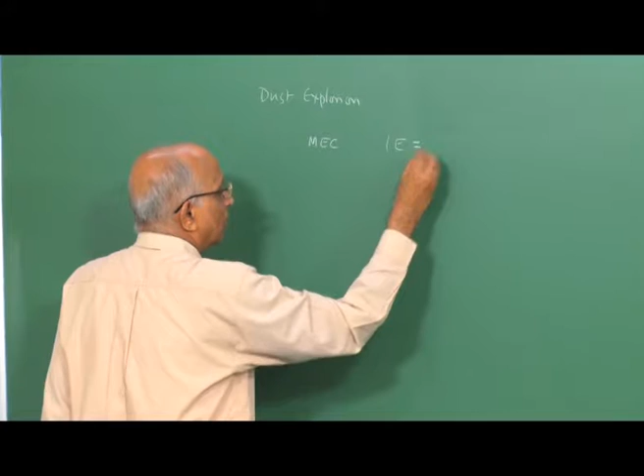In the class we just covered on dust explosion, we looked at the different types of dust. We found that a dust-air mixture is explosive, and that above a certain concentration, something like a minimum explosive concentration, is required to form a dust explosion. We also found that dust explosions are numerous, so there must be methods to control them. We looked at the sensitivity of dust mixtures to explosion, and also the consequences of explosion in terms of explosion severity. We defined an index of explosibility, IE, as the product of ignition sensitivity and explosion severity.

In today's class we take a slightly different topic, namely we look at physical explosions. That means we are looking at explosions being driven by some physical processes such as flash vaporization.

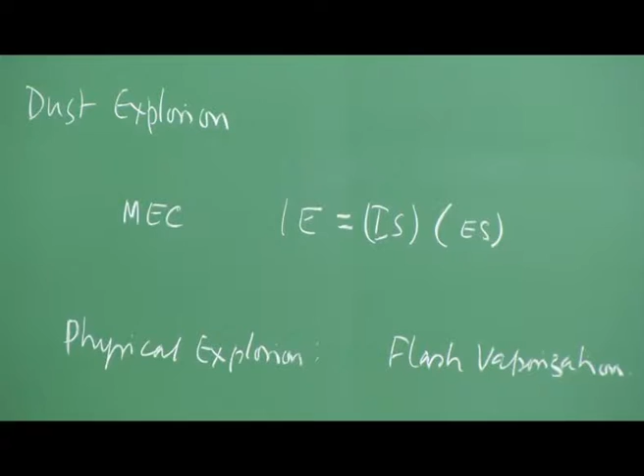But before getting into this topic, since we said dust explosions are dangerous and there are numerous instances where organic and inorganic dust mixtures are a problem, something we did not cover was how to ensure such explosions do not occur, or what safety features we incorporate to prevent a major catastrophe involving a dust explosion.

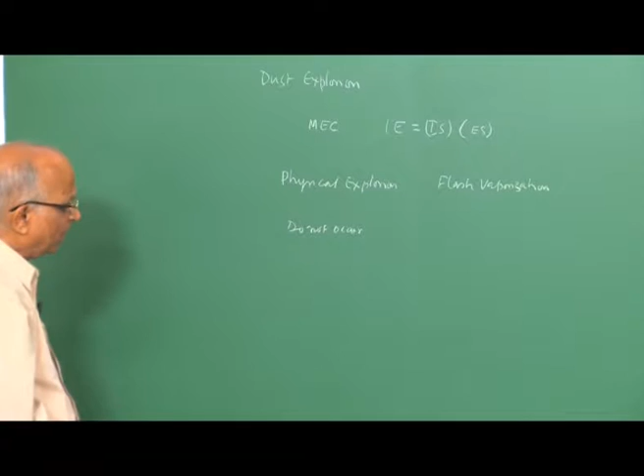Since we talked in terms of a minimum explosive concentration required, the easiest thing is to make sure the dust does not form this explosive concentration. That means in the particular chute, hopper, or transport system, or in the confinement where the dust-air mixture exists, its concentration should be less than the minimum explosive concentration determined for the different dust mixtures.

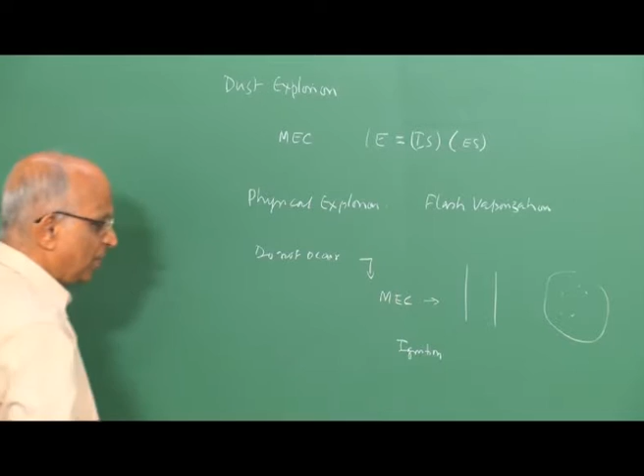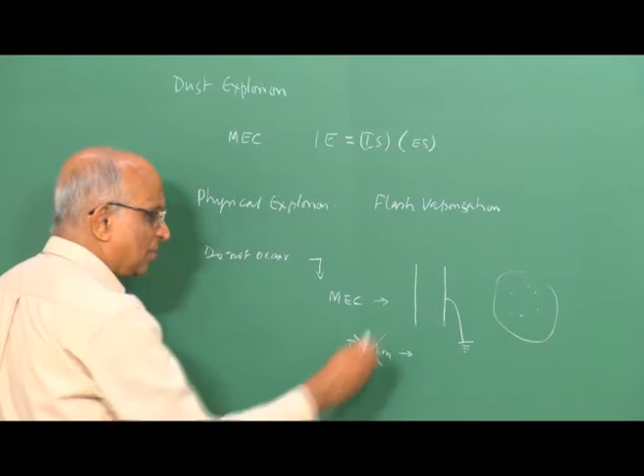An ignition source is always required to start an explosion, but preventing an ignition source from occurring is always difficult. We should take precautions, such as properly earthing the conveyor in which the dust is transported, so the chances of an accidental spark are reduced. But whatever is said and done, ignition sources are present, and the safest thing is to ensure that a minimum explosive concentration of the dust-air mixture is not formed.

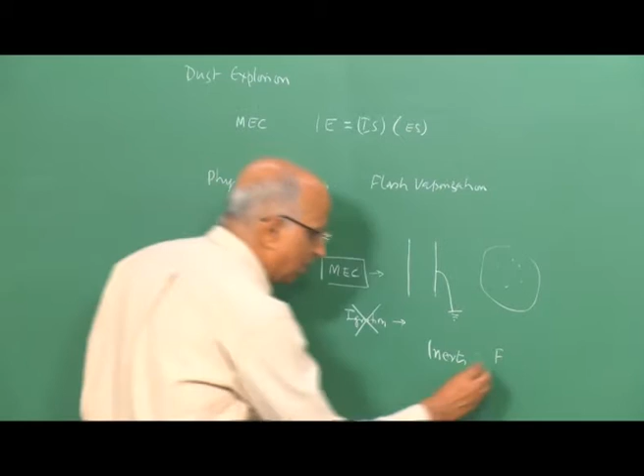This is point one. Supposing we have to handle concentrations greater than the minimum explosive concentration, we may have to add some inerts. Some inerts which have been added include substances like Fuller's earth and mud powder, which bring down the concentration from the actual value so that it reduces below the MEC value.

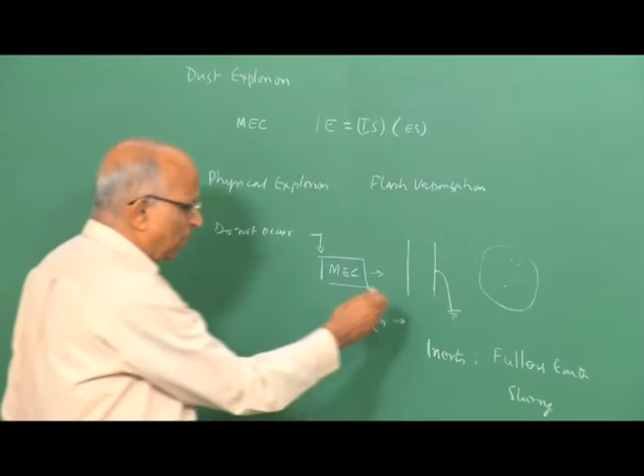The other alternative is to make a slurry of the dust and handle the slurry instead of the dust-air mixture, but then you have to remove the liquid, and it's somewhat a laborious process.

Another type of safeguard: since the dust mixture forms a flammable gas mixture, we could add something like phosphorus compounds, for example ammonium phosphate. When chemical reactions occur, the ammonium phosphate takes in the active radicals and impedes the chemical reaction, so the maximum pressure and rate of pressure rise, the severity of the pressure rise, can be reduced by adding such substances. This is a way of inhibiting the fire or chemical reaction.

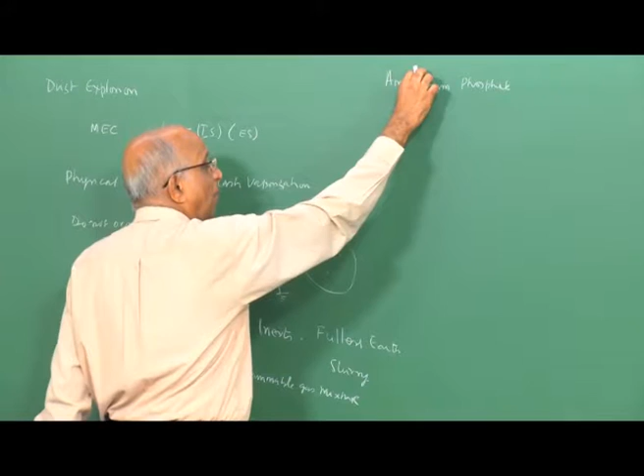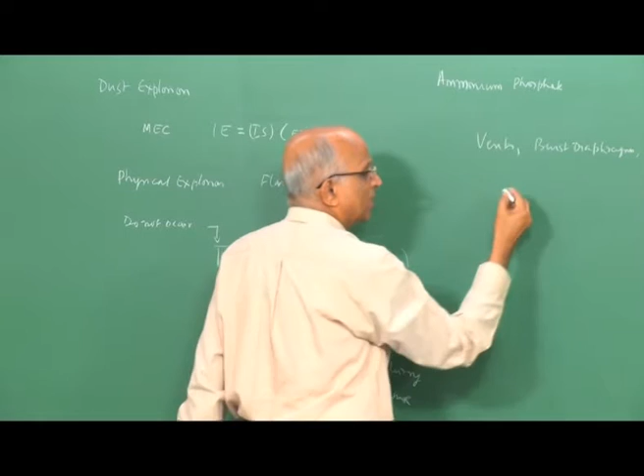This is in terms of bringing down the minimum explosive concentration. But in addition, one of the safety features used for confined explosions can also be adapted here, such as providing vents, burst diaphragms, and explosion doors in the particular appliance involving the dust.

What this essentially does: if I plot pressure as a function of time, the pressure increases in an explosion to a maximum value PM, and at the corresponding inflection point, dP by dt is maximum. What the vent or burst diaphragm does is, if appropriately caused to burst and vent out the burned and unburned products or dust, the pressure falls.

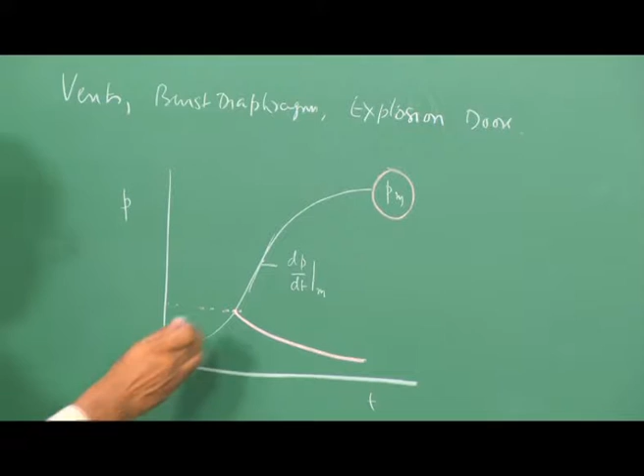In this case, I am guarding against the value of PM, the pressure at which the diaphragm gives way or the explosion door opens. The value of the pressure rise can also be controlled. Provision of this is important, but we must remember that when you vent out a fire or an explosion, you must not vent it into neighboring areas where explosives might be housed. That precaution must be taken.

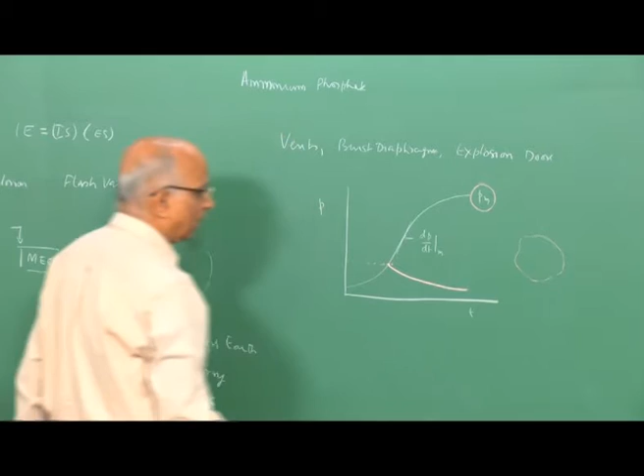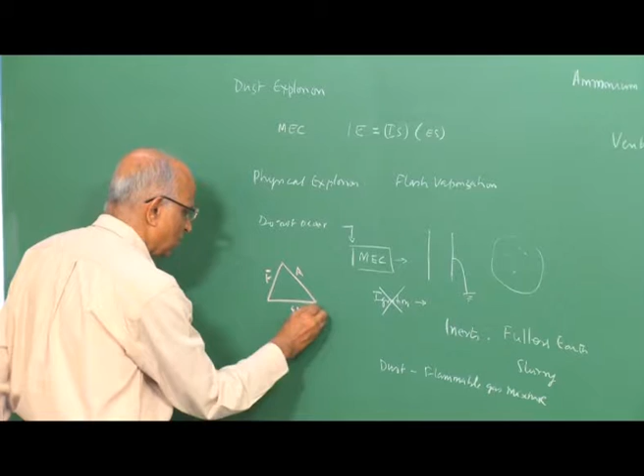Methods of preventing a dust explosion, or taking precautions, include trying to ensure accidental sparks are not present so that the fire triangle is not complete - you have fuel, air, and the spark or ignition source is removed. Or bring down the minimum explosive concentration using Fuller's earth or a slurry. Or ensure chemical inhibitors like ammonium phosphate are added, which brings down the rate of reaction. This is the method of controlling a dust explosion.

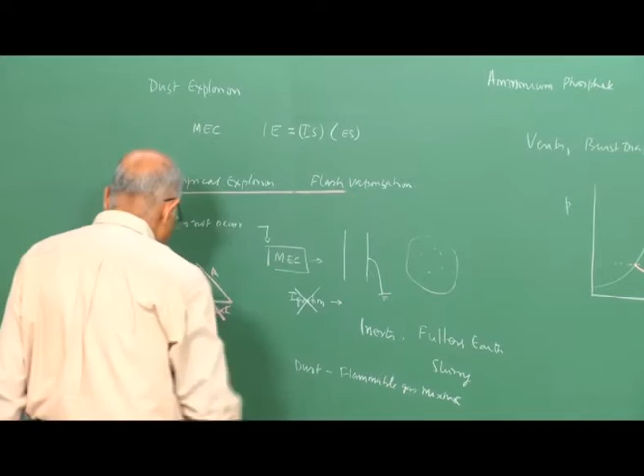Having said this, it's time to get into physical explosions. Let's see what it is about. Let's start with a few examples, because examples are illustrative and we will be able to study the mechanisms using these examples. We get started with the very famous example which we talked about in terms of natural explosion.

This is the explosion which happened in Krakatoa, around 1883 or so, in which you have a huge volcanic eruption. What happened is volcano lava was being generated, and due to a tidal wave, a lot of seawater got into the volcano. The volcano is hot, and the mass of the heated substance, lava, is enormous - the thermal mass of this hot substance is large. Into it, a huge quantity of water is getting in, and the water gets locally heated.

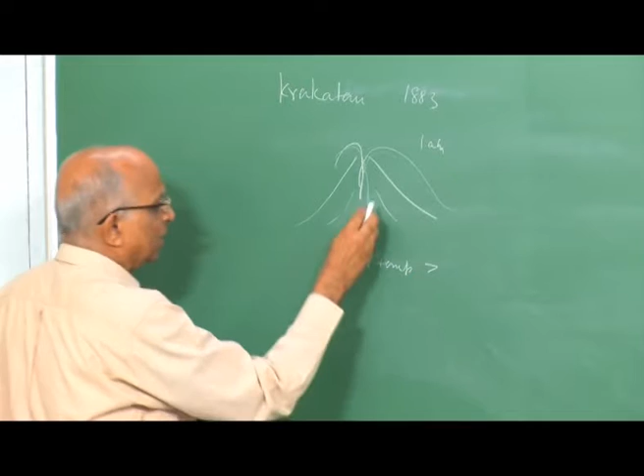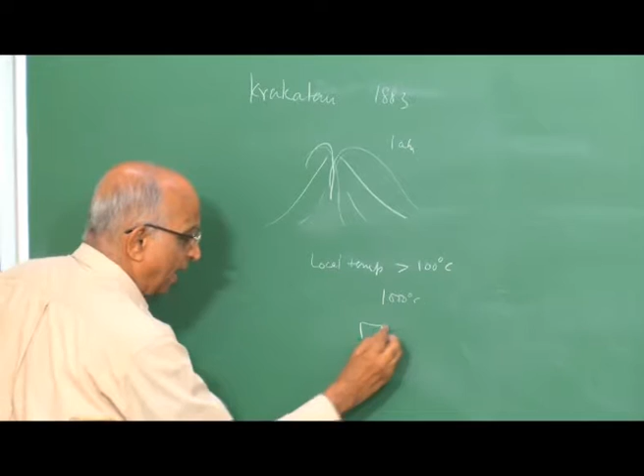The ambient pressure is 1 atmosphere, and the ambient pressure inside the volcano, mind you, it's not choked, is also 1 atmosphere. The local temperature of water exceeds the ambient temperature at which water boils - water boils at ambient at 100 degrees centigrade. The temperature here is so hot that this hot value could be around almost 1000 degrees centigrade, the temperature of the molten lava, and this molten lava heats water locally to around 1000 degrees centigrade. But you well know water cannot exist at these high temperatures as a liquid. As a result, this state is a metastable state.

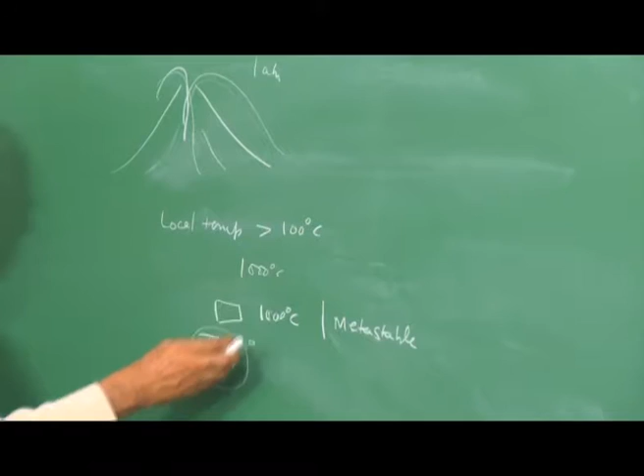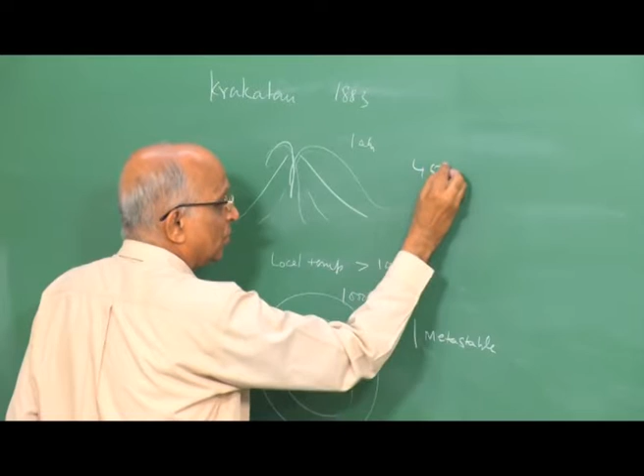That means the water is overheated to a very large temperature. At this temperature, the water sees the ambient pressure, and at ambient pressure, water can exist only up to a temperature of 100 degrees centigrade. Therefore a lot of energy gets locked into the water and it just flashes into a vapor. This flashing of vapor in this particular volcano generated blast waves or shock waves, and we said the shock waves were heard up to a distance of 4,500 kilometers away from the volcano. Such is the power of this physical process of flash vaporization.

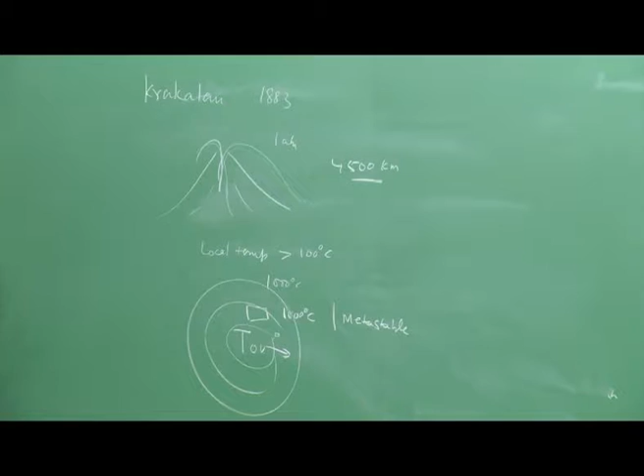Flash vaporization occurs because a metastable water is formed. This metastable substance cannot exist as a liquid, so it flashes into vapor. The large volume of vapor compared to the volume of water drives or forms a shock wave or blast wave which is so strong that it travels over a distance of 4,500 kilometers. Well, this is the first example.

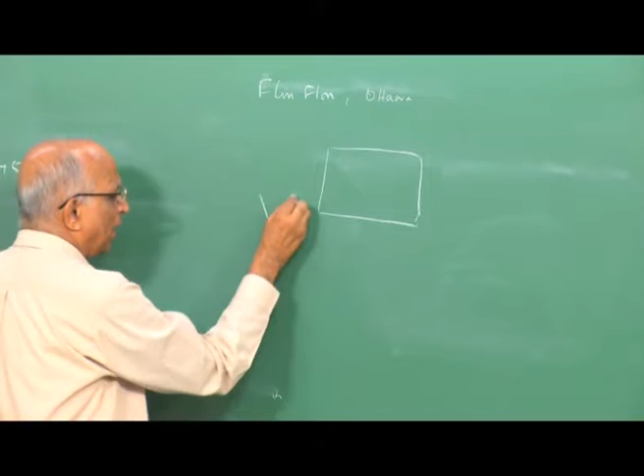We also talked of a smaller example. Flin Flon in Canada, at a place near Ottawa, around the year 2000 or so - people wanted to go home early. There was a hot furnace, maybe a crucible furnace or a reverberatory furnace, which was still hot, but they still wanted to go home. They took water in a bucket or a pail and poured it into the furnace. Since the thermal mass of the furnace was still very large, much larger than the mass of water being added, the water instantaneously attained a much higher temperature than the normal boiling point at 1 atmosphere, and it flashed into vapor, causing an explosion.

We also talked in terms of the explosion at Port Hudson. This is the third example.

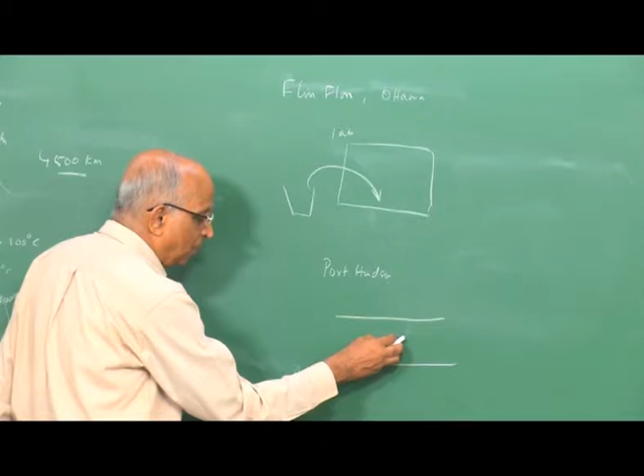In this example, we had a pipeline transporting liquid propane at high pressure, at ambient temperature. But at 1 atmosphere pressure, the boiling point of propane is about minus 42.4 degrees centigrade. Therefore, the propane at ambient temperature and high pressure, when it sees the lower atmospheric pressure, immediately flashes into vapor. When it flashes into vapor, it absorbs the latent heat from the liquid which is coming out, and you form a fog.

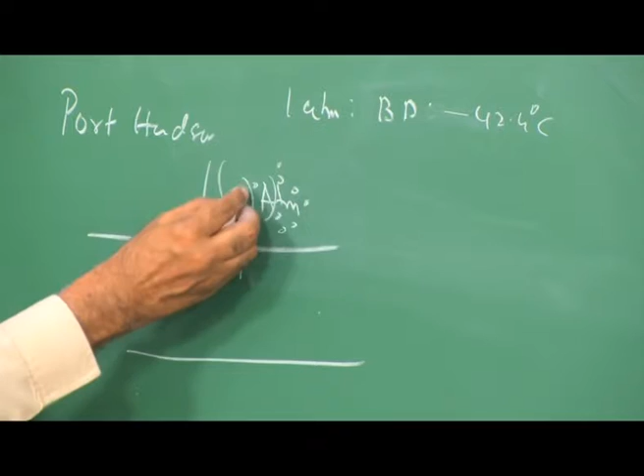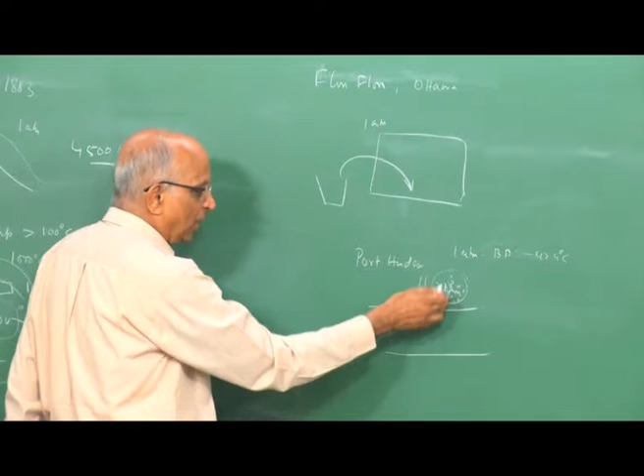We will take this example for analysis a little later. All we are saying is we had the case of a volcanic eruption, known as a hydrovolcanic explosion, or just a volcanic explosion involving water. We talked of water being poured in a furnace which creates an explosion, and of substances stored at a temperature higher than the normal boiling point corresponding to atmosphere, which can again cause flash vaporization.

We want to quantify this for the energy release. We want to see the mechanism by which an explosion will take place. Let's get into some details of how to go about it.

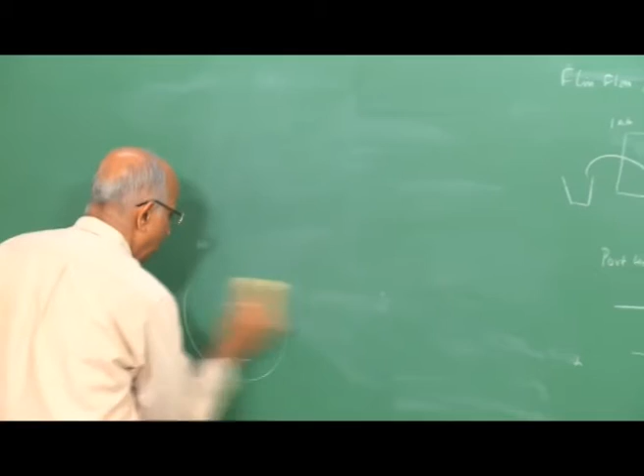The first point we note is we are always thinking in terms of a metastable condition for the liquid. The temperature is overheated much above the boiling temperature, and since it is, you have a certain mass of the liquid which is overheated, which also has a specific heat. The energy content of the overheated liquid, at this metastable temperature, cannot exist in equilibrium there. It can exist at equilibrium only at the boiling temperature.

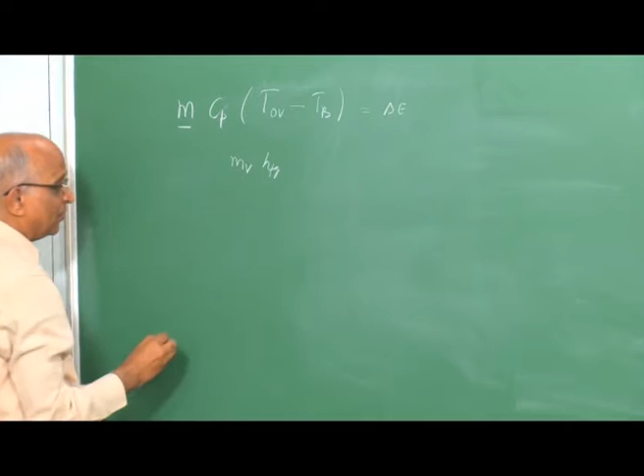Therefore it is at this unstable state, and this is the excess temperature. Its specific heat, let's say, is Cp, at atmospheric pressure, and you have the mass of the particular liquid which is available. This is the excess energy which is available. This mass has a latent heat of vaporization at atmospheric condition corresponding to HFG, and therefore part of this mass gets evaporated, mv into HFG, and this heat is derived from this excess energy.

This excess energy is waiting to get released, and it gets released by vaporizing part of this particular mass which is in this metastable state. Therefore we have mv, the mass which gets vaporized, into the latent heat of vaporization, equal to m Cp into T, the overheated or metastable temperature, minus the boiling point temperature, which let us call Tb.

Therefore, mv by m, which is the fraction of the liquid which evaporates, is equal to Cp into T overheated minus the boiling temperature, divided by the value of the latent heat. Now, this fraction has to be less than 1.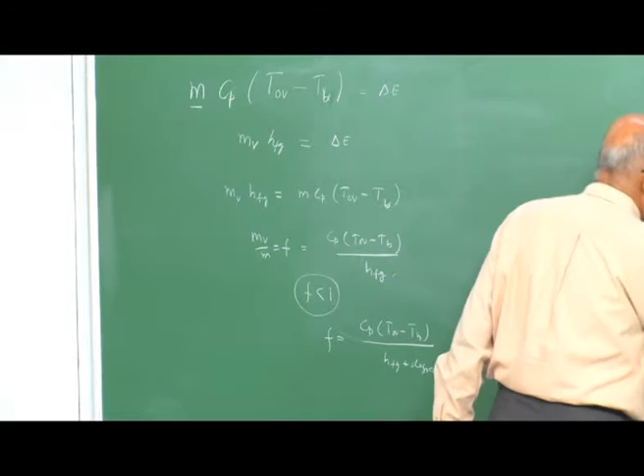We are thinking in terms of the overheated temperature, or the metastable temperature, T overheated, being very much greater than the boiling point temperature. That means what has happened is, initially I have a liquid which is very much higher, that means it is terribly overheated.

The boiling temperature of the liquid can be much smaller than the actual temperature, so the liquid contains excess energy. It is just waiting to release it, and it flashes into vapor. The fraction of this mass which flashes into vapor is what I have written here.

But we are talking of these temperature differences being large. We also talk in terms of the specific heat Cp and in terms of HFG. Whenever we talk of these things, I cannot talk in terms of a larger number.

Let us, for the present, assume that the degree of overheat compared to the boiling point is dT, the amount by which the overheated temperature exceeds the boiling temperature, and let it be a small number to begin with.

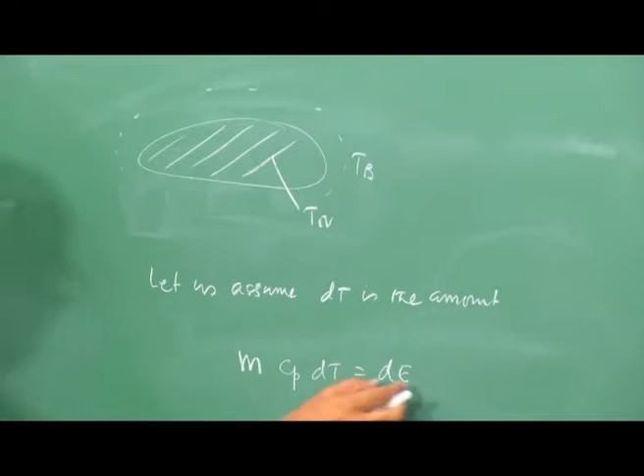Therefore, the energy associated when the non-equilibrium temperature compared to the equilibrium boiling point temperature is greater by dt is m into Cp into dt, which equals the small value of energy over and above the value at the boiling point. That is, this is the excess energy which this substance has, since its temperature is greater than the boiling temperature locally by some particular amount.

Mind you, the ambient pressure is still 1 atmosphere. And what does this energy do?

It causes some evaporation. Let the mass which gets evaporated be dm, and at atmospheric pressure the value of the latent heat, HFG, is in joules per kilogram, dm is in kilograms. We can write this equation as dE equals m Cp into dt, which equals the energy supplied for vaporization, which equals dm into HFG.

Now, if I bring dm divided by m, taking m to the right hand side, I get dm over m equals Cp into dt divided by the latent heat, that is dt by HFG.

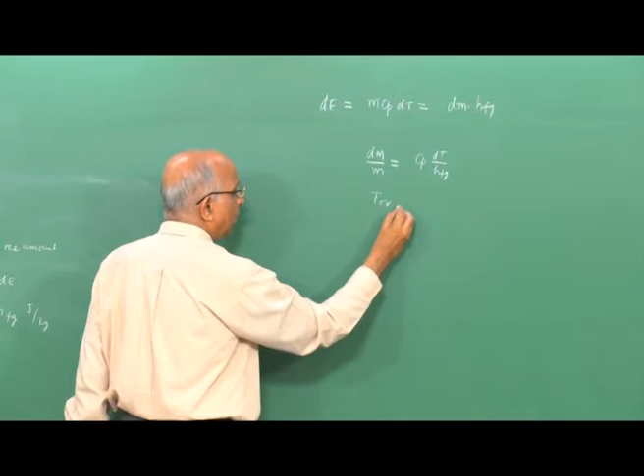Now, in practice we say the overheating is not by a small amount. I find the overheating is T overheated, and the boiling temperature is Tb, and this is sizable. So in the process, from the initial mass of liquid available, a mass mv gets evaporated, and therefore the final mass of the liquid equals m minus mv.

Therefore, if I integrate this equation, I get the integral of dm divided by m equals Cp dt by HFG, as the temperature goes from the overheated value to the boiling temperature, that is when it is releasing a particular mass or flashing into vapor.

Initially I have a mass m, and the final mass of the liquid is m minus the mass which is evaporated, mv. The initial mass of the overheated, unstable or metastable liquid corresponding to temperature T overheated corresponds to m, and corresponding to the boiling temperature when it evaporates, the mass left is m minus mv.

Therefore, when I integrate, I get ln m going from m to m minus mv, and on the right hand side I get Cp.

But Cp is also a function of temperature, and that is the main reason why we are doing this. So we say in the region between Tb and T overheated, let the mean value of specific heat Cp be Cp bar, such that I can take it outside, and this corresponds to HFG at 1 atmosphere pressure.

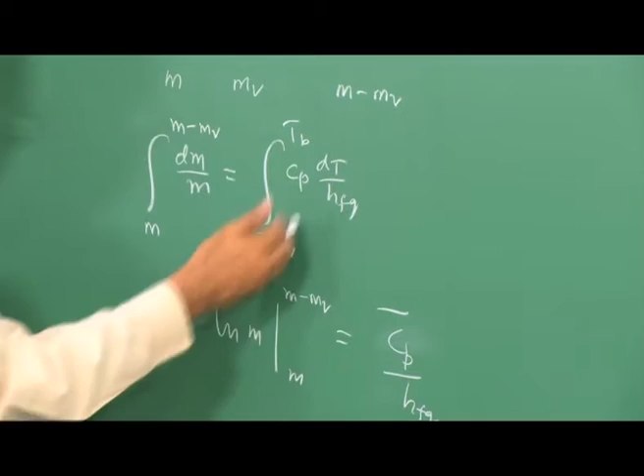I can say it does not depend on these temperatures, it is a totally different variable. Then the increase in temperature from the overheated or metastable temperature to Tb, integrated as dt, gives me a negative sign since overheated is higher, equal to Cp bar into T overheated minus Tb divided by HFG.

Therefore, on the left hand side I have ln of m minus mv, minus ln m, which I can also write as ln of m minus mv divided by m, since ln(m minus mv) minus ln m equals ln((m minus mv)/m). This equals minus Cp bar into the metastable temperature minus the boiling temperature, divided by HFG.

Now, if I simplify this expression, I get ln of 1 minus mass evaporated divided by the mass of the overheated liquid is equal to minus Cp bar into T overheated minus Tb divided by the latent heat of vaporization. This is the fraction I am looking for, the mass which gets evaporated, and this evaporated mass has a very large volume compared to this.

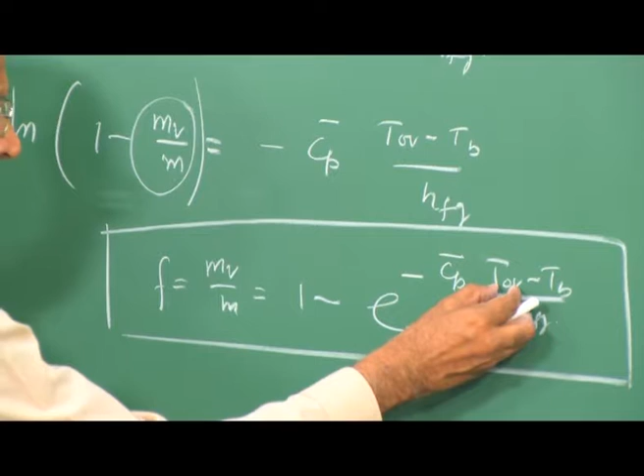When I talk in terms of flash vaporization taking place, the temperature to which the water or any liquid is locally overheated must be very much higher than this, such that I generate a lot of vapor. Since this vapor has a larger volume and it is in a particular confinement, it creates a higher pressure and therefore a blast wave. This is how we estimate the particular fraction F, but let us go back and try to understand the problem further.

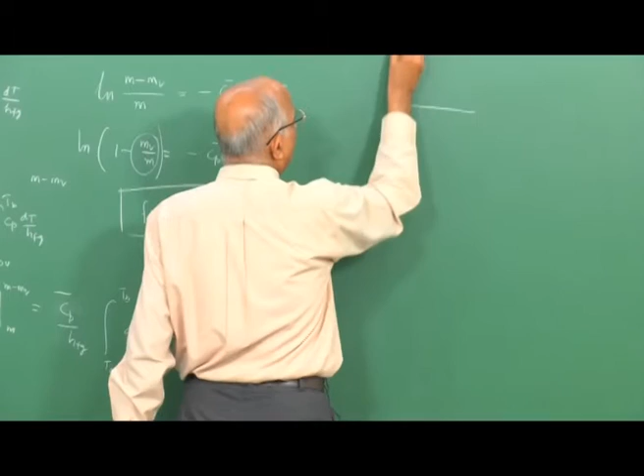Let us look at the diagram for, say, water or some other liquids in the temperature versus volume diagram. In thermodynamics we say pure substances can always be talked of in terms of the two property rule, and we try to apply it for steam water mixtures, so let's use this diagram.

But before using this, we must realize why flashing into vapor happens. As pressure changes, the boiling point changes, and this boiling point corresponds to the saturation vapor pressure. As pressure increases, the boiling temperature increases.

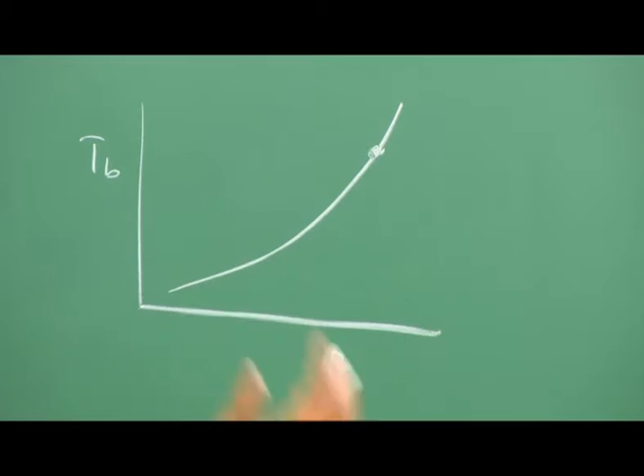It is this variation which essentially causes, at some point, the liquid to be at a high pressure, and then all of a sudden the constraint of this high pressure is removed—like for instance, there is a leak, it leaks into atmosphere. Corresponding to that you have a lower boiling temperature; this is the original value. When I look at atmospheric pressure, the boiling temperature is lower, but it was originally at this pressure, so it still retains the memory of this.

The liquid is at this temperature, but now the pressure is low, so it feels that this temperature is sort of a metastable value. It just flashes because it has to reach this lower value, and this is how flash vaporization takes place. We have to look at it in the T-V diagram.

This particular process, namely the dependence of the boiling temperature on pressure, is what is used to store many gases. Let's take one or two examples so that the problem gets a little more focused.

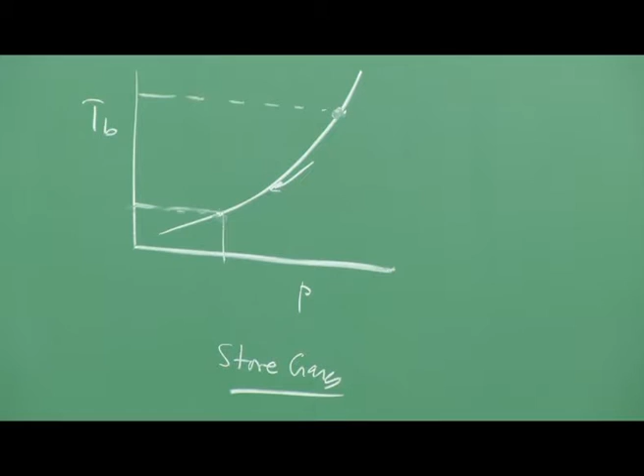Let's consider the example we use in our kitchens normally, butane gas—it comes by different names. Say I store butane gas in a cylinder in the kitchen. I have a pressure regulator here, I connect the gas through a particular cable to a stove, and this stove has different burner heads. I allow some air to get entrained and supply the fuel-air mixture to the burner heads. I put my vessel here and boil my water or whatever for cooking. So in this cylinder I have butane.

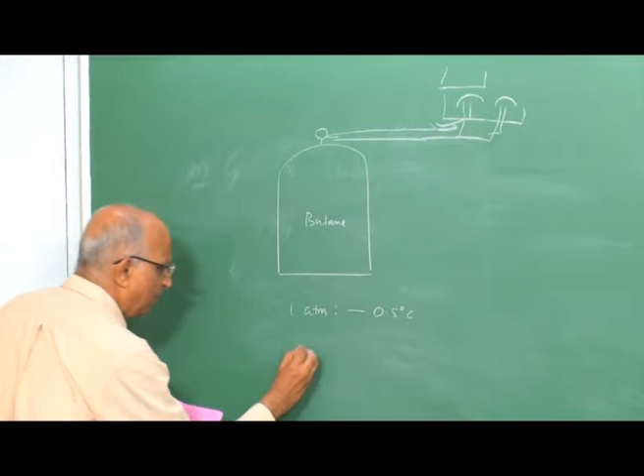Let me take you through some properties of butane so we can put the problem more clearly. At 1 atmosphere pressure, butane has a boiling temperature of minus 0.5 degrees centigrade. If the pressure is 1.5 atmospheres, butane boils at a temperature of 10 degrees centigrade.

At 1.5 atmospheres, butane boils at 10 degrees centigrade. At 2 atmosphere pressure, it boils at 21 degrees centigrade. And at 3 atmosphere pressure, liquid butane boils at 32 degrees centigrade.

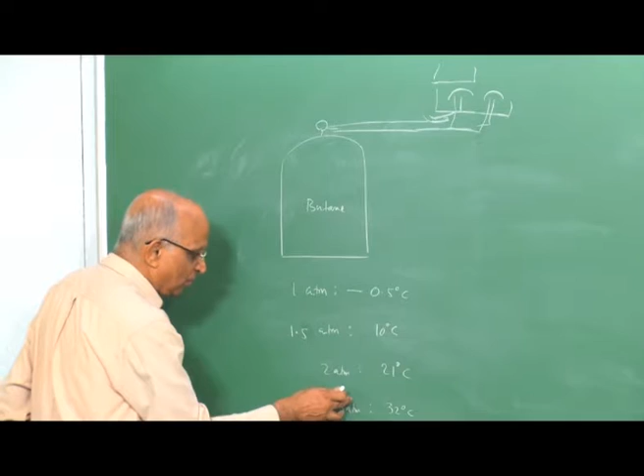That means below this temperature, if I increase the pressure to something like 3 atmospheres, I can store butane as a liquid, and that is how these gases are stored in small cylinders. The butane gas we know as Indane gas, Bharat gas, whatever commercial names exist, is essentially butane with other hydrocarbons. You store it as liquid, for instance at 3 atmosphere pressure, when ambient temperature is around 30 or 31 degrees centigrade, I have butane as a liquid.

This liquid is in equilibrium with the vapor here. The vapor is also at let's say 32 degrees centigrade, both liquid and gas are at 3 atmospheres. When I open my regulator, I get the gas coming at a pressure of around 3 atmospheres, which is not very high, it entrains air, mixes and comes out.

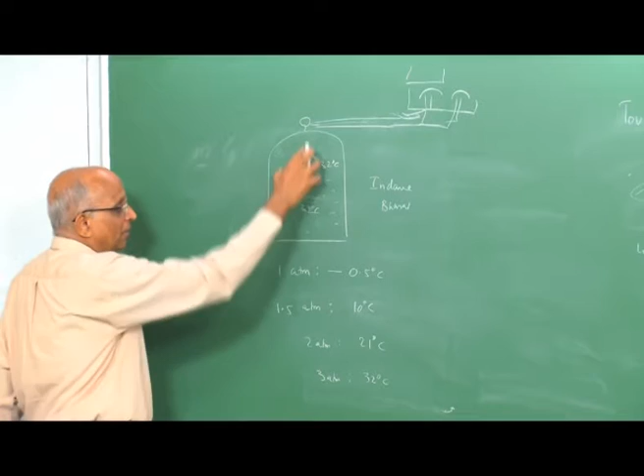Normally the rule is you must keep the cylinder vertical. But suppose I keep my cylinder horizontal like this, and the cylinder is full with liquid butane at 3 atmosphere pressure. I connect a hose to my stove, and what happens the moment I open the regulator? The liquid gets into the line and flashes into vapor.

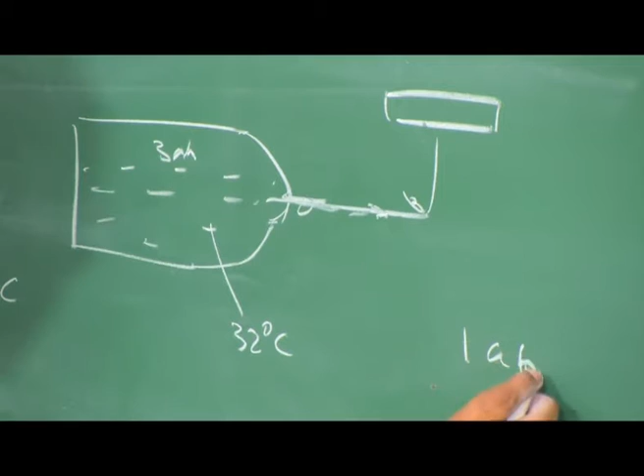This liquid, which is at 32 degrees centigrade at 3 atmospheres, when it comes here sees a pressure of 1 atmosphere, maybe before it starts entraining air. At 1 atmosphere it boils at minus 0.5 degrees centigrade. Since the ambient temperature is something like 30 or 35 degrees centigrade, it is going to just boil off because it cannot exist as a liquid at 1 atmosphere pressure above its boiling point of minus 0.5 degrees centigrade.

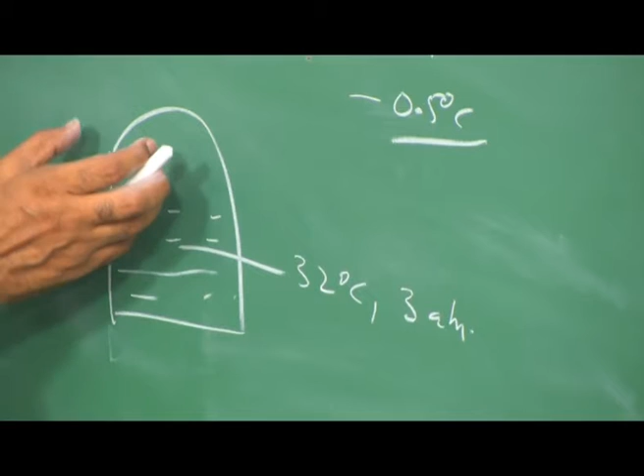It just flashes into vapor, and I will have all sorts of problems. In fact, if the cylinder explodes, say by heating or some other mechanism, what happens? I have the butane liquid at a temperature of 32 degrees centigrade and a pressure of, let's say, 3 atmospheres. When the cylinder bursts, the liquid immediately sees a pressure of 1 atmosphere.

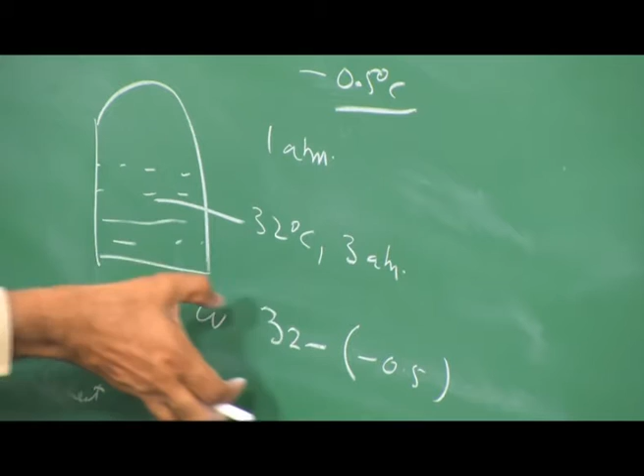Now I have excess energy corresponding to 32 minus minus 0.5, into the entire mass, into the specific heat. This excess energy exists because the liquid has to reach the equilibrium value, and this energy causes a spurt in volume leading to an explosion. This is a practical case where explosion or storage of liquid gases we use daily could cause problems. We have to handle them carefully and understand this aspect of physical explosions involving flash vaporization.

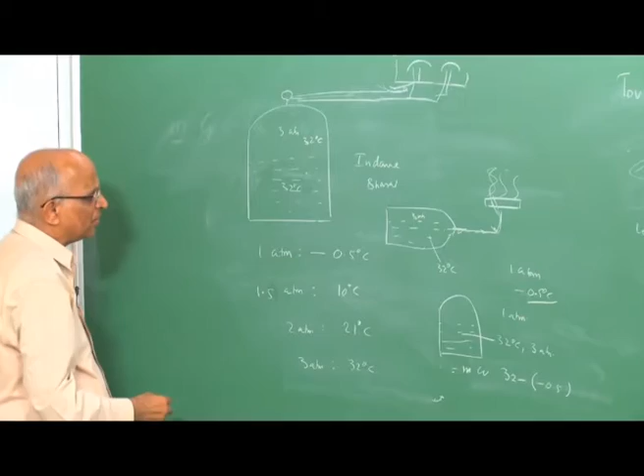Let's get back to the one where we wanted to plot on the TV diagram the plot for water, and if we know water we can extend it to other substances. We want to find the region in which water exists, the region in which water and steam exist, and the region in which steam alone exists as superheated.

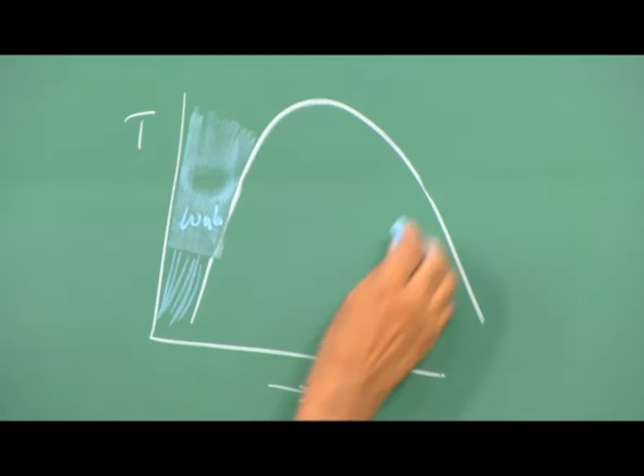On the TV diagram we had something like a dome shape. In this dome shape, on the left side we have water as a liquid. We have steam on the right side. This is all steam over here, and in this region we have water and steam together.

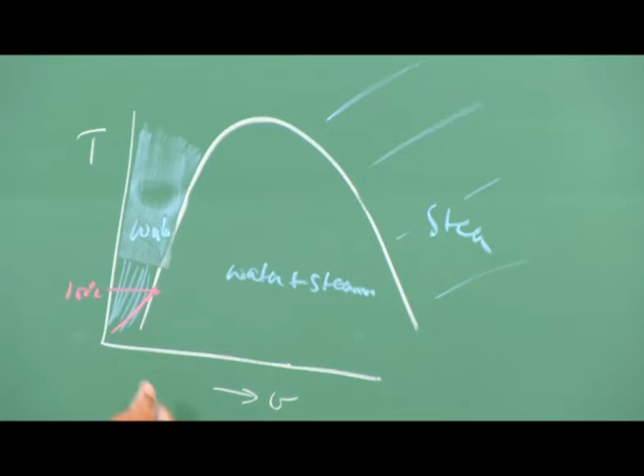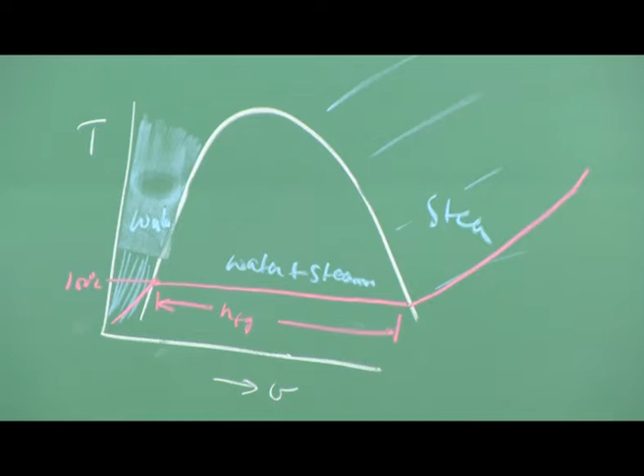If I consider a line corresponding to, say, atmospheric pressure, I heat water, increasing in temperature to around 100 degrees centigrade at 1 atmosphere pressure. Then I go horizontally along the water-steam line, and this corresponds to the latent heat, which we called HFG. Once all the water has become steam, any further heating causes the temperature of the steam to increase. Let's plot that for a slightly higher pressure.

Well, the temperature is higher, at the boiling temperature is higher. This is water, it goes over here, and I have the constant pressure line. At this particular pressure, this is the latent heat of water, that is the latent heat for vaporization, the heat required to go from water to this. The line on the left hand side is the saturated water line.

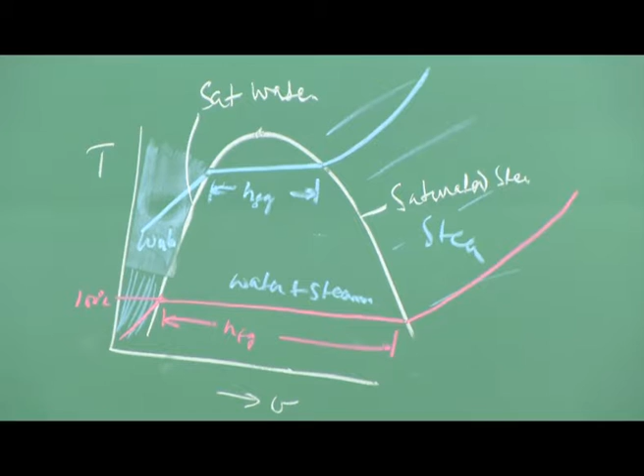The line on the right hand side is the saturated vapor line or saturated steam line. They meet at the critical point, and the critical point temperature is typically, for water it is equal to 374 degrees centigrade, and the critical pressure, that is the pressure corresponding to the particular point, is 221 bar. This is the temperature for water.

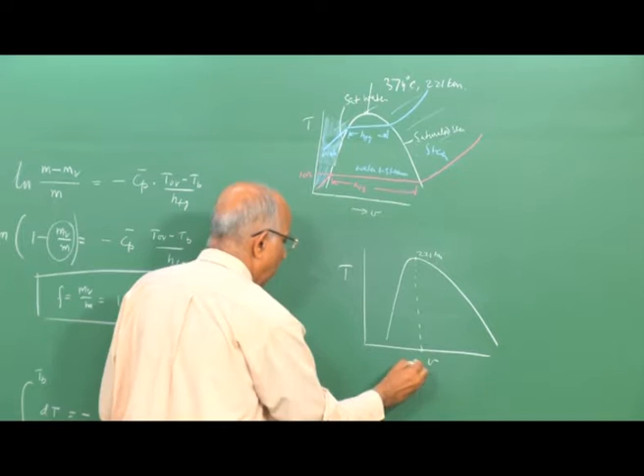You have the water line, you have the steam line over here. Corresponding to this particular critical point, the critical point means there is no distinction between vapor and liquid. Both the density of the vapor is as high as the liquid, it cannot be distinguished. Corresponding to something like 221 bar and let us say 374 degrees, the specific volume of vapor which we are plotting here, temperature versus specific volume of vapor, is around 0.00317 meter cube per kilogram.

This is the volume. Now, what is happening? We have atmospheric pressure, atmospheric pressure, atmospheric pressure, and now let us say this temperature is 100 degrees centigrade under 1 atmosphere pressure. We have water which is at 35 degrees centigrade over here.

This water is suddenly, let us say, poured into a very hot substance at a temperature of the order of 350 degrees centigrade, because the critical point temperature we just saw is equal to 374 degrees centigrade. Therefore, what happens when I pour this water on a plate having large thermal inertia which is at this temperature? I sort of push the water into this particular state over here, and this is the state at which water is available to me at this hot condition.

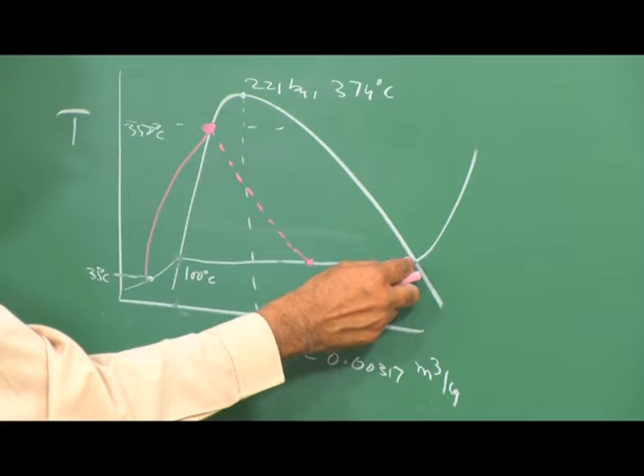But the ambient pressure is still 1 atmosphere pressure, and therefore this is a metastable state, and therefore the water evaporates and I get steam at this particular dryness fraction. That means I have so much of liquid and so much of vapor, and if I look at the vapor content, the difference in the volume of the fluid here and the fluid here is very small. We will do a problem relating to that, whereas the volume of the vapor corresponding to saturated is very much higher.

You have an intense quantity of vapor being generated from this quantity of water, and that is what creates a blast wave. Therefore, if I have to solve this problem, let us put a few symbols down and again calculate the mass of vapor being formed and the energy which gets released. We have delta E, that is the energy which gets released, is equal to, well, I think we have to have the guidelines of this particular figure.

We have temperature versus specific volume, meter cube per kg. Let us say temperature is in degrees centigrade over here. We have the initial line for water at 1 atmosphere pressure. This is water line, comes here saturated water, wet steam, and then saturated vapor goes into superheated vapor. This is the stable boiling temperature at 1 atmosphere pressure, this is the 1 atmosphere line.

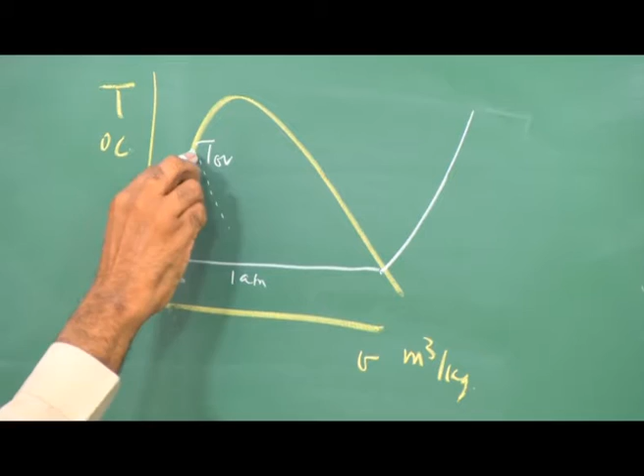Now, when suddenly water at this temperature is heated to a value of this high temperature over here, that means this is my locally overheated temperature or my metastable temperature, and therefore it is not able to stay there. Therefore, the excess heat which the water contains can only exist, final state can only be here, whereas it is locally heated to this.

Therefore, the condition, if I say this point is A, this point is B over here, delta E corresponding to 1 kilogram is going to be the condition at A, that is the water at state A which is metastable, the state B which is stable, this is the heat content per kilogram. Or rather if I have mass which is equal to m, the total energy, that is the excess energy over here compared to this which it wants to get rid of, is equal to m into HA minus HB.

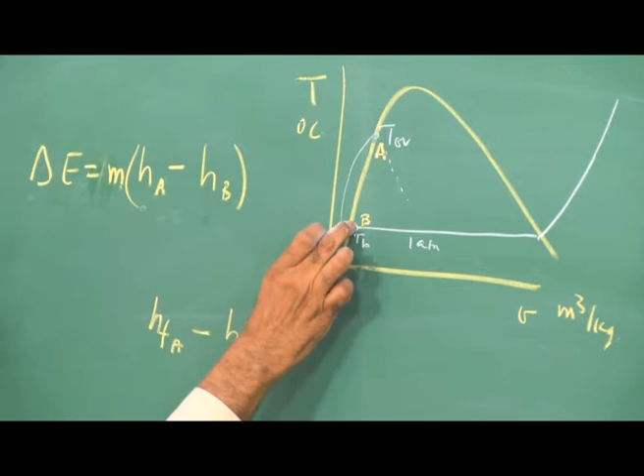It has to overcome and supply this latent heat, because this excess energy goes into vaporizing the water, and therefore I have a vapor which is formed, which corresponds to HFG. This energy which is locked into the water at this metastable state vaporizes and forms mv kg of vapor. I know the value of the latent heat corresponding to atmospheric pressure. Therefore this corresponds to the latent heat, and mv divided by m is equal to HFA minus HFB divided by HFG, in terms of the enthalpies.

Therefore I find this is the mass of water, and the energy locked in is this amount, which is also equal to the mass of water evaporated times HFG, so much joules. It is this energy which drives the explosion. Equivalently, you form vapor which has a much higher volume compared to the initial volume. Since I generate vapor with large volume, I increase the pressure inside my appliance, or inside my volcano, or inside my furnace, and generate a blast wave. This is the mechanism by which flash vaporization drives an explosion.

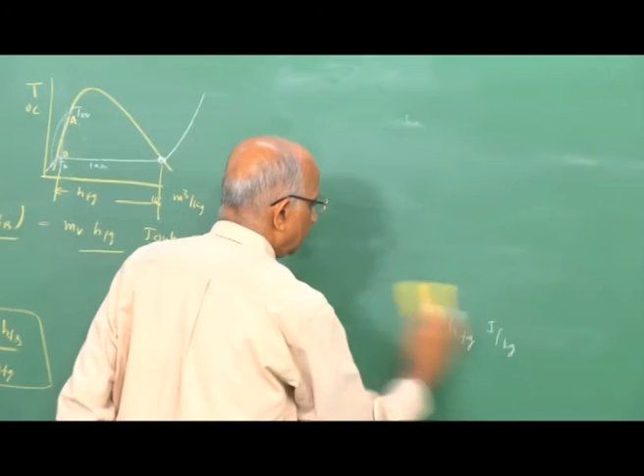Let's do one particular numerical example so things become more clear. Let's take the example of the Flin-Flon incident.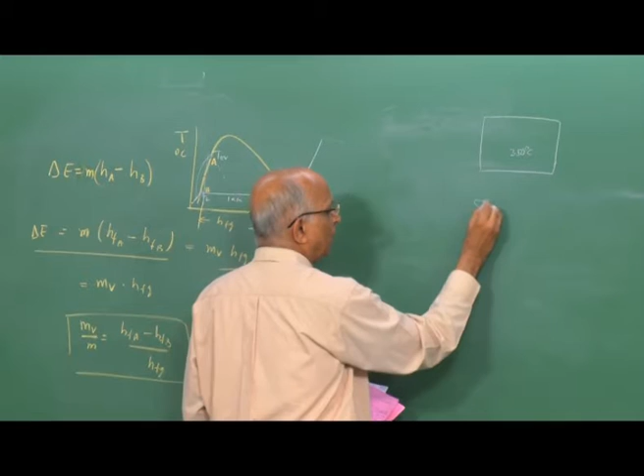Let us assume that in a particular furnace, kept at an operating temperature which would have been higher, the furnace has cooled down to 350 degrees. As it takes more and more time to cool as the temperature decreases, people take some water, 50 kg of water, maybe at ambient temperature. That day the temperature was, let's say, 20 degrees centigrade, and they throw it into the furnace. Let's also assume the thermal inertia of this furnace is large, since the furnace has a large mass compared to 50 kg of water.

Therefore, this 50 kg of water, immediately when exposed to this temperature, as soon as it touches the metal, increases to a temperature of 350 degrees centigrade. At 350 degrees centigrade, the ambient pressure is still 1 atmosphere, since the furnace is exposed to the ambient, and the boiling temperature at 1 atmosphere is equal to 100 degrees centigrade. Therefore, the water just flashes into vapor.

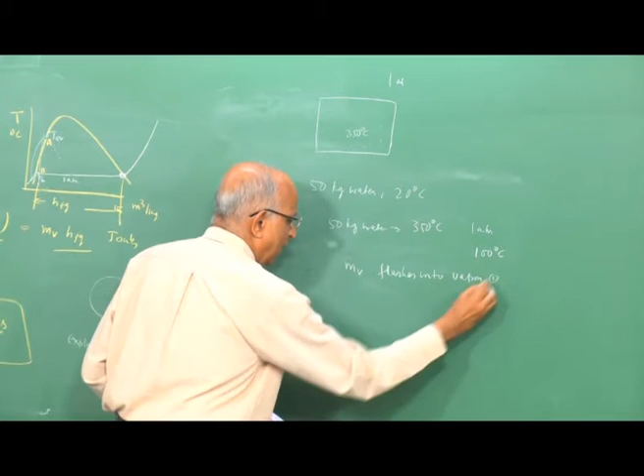I want to calculate the mass of water which evaporates, or which flashes into vapor, and second, I also want to calculate the energy released in this flash evaporation process.

We again draw the TV diagram, since it's the simplest approach, though we could also use the formula I derived earlier, fraction equals 1 minus e, but then we need the value of Cp. We have steam tables for all the liquids to solve this problem. On the TV diagram, V is the specific volume and T is the temperature. Let's draw the ambient line, the ambient pressure line at 1 atmosphere, where the temperature is 100 degrees centigrade.

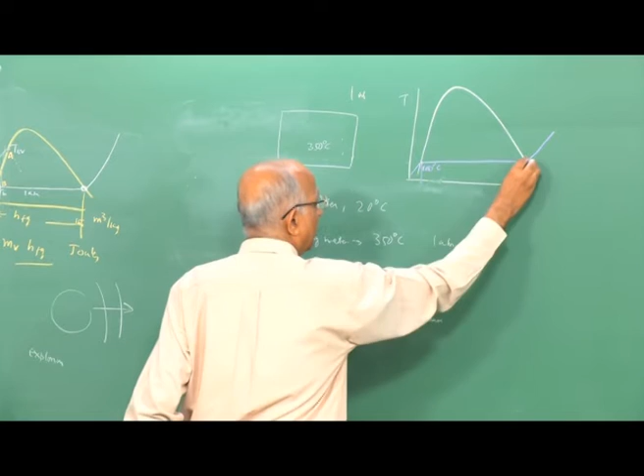And the volume, if I make a note of it, at 1 atmosphere pressure, the specific volume, Vf, that is V of the water at this particular point — using the same terminology, points A and B — this is point B, at the boiling temperature, which is a stable point. Vf is equal to 0.001044 meter cube per kilogram.

The water is at 20 degrees centigrade, somewhere over here. You suddenly throw it at a temperature of 350, increasing it to this value, even though the pressure is atmospheric, because the body attains the temperature of the furnace. This is what the temperature is like, at 350. At 350, the specific volume is equal to 0.00174 meter cube per kilogram.

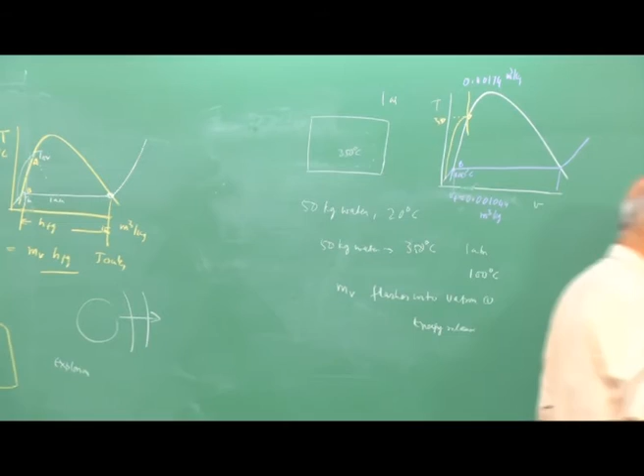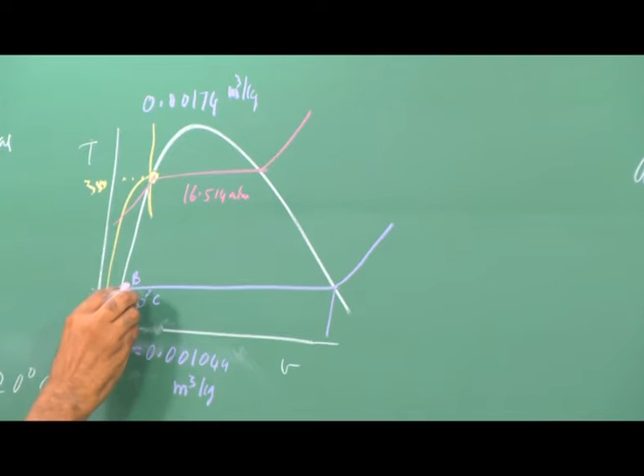The pressure corresponding to this particular point of 350, if I were to draw the constant pressure line passing through this point, the pressure corresponding to this red line is going to be 16.514 atmospheres. Therefore, the moment we throw water at 20 degrees centigrade, it reaches this temperature of 350, it can be in equilibrium only at this particular pressure, because of this temperature, but it sees only the ambient pressure of 1 atmosphere here. So I need to evaluate the value of enthalpy over here.

This is the energy locked in for unit mass of substance. Let's get the values from the steam table. I have HF corresponding to point A over here. HFA is equal to, if I look at the steam tables, 1344 kilojoules per kilogram. If I take the value of HF at B, point B, which is the normal boiling point, normal boiling temperature of the saturated liquid at 1 atmosphere pressure, the value is 419.

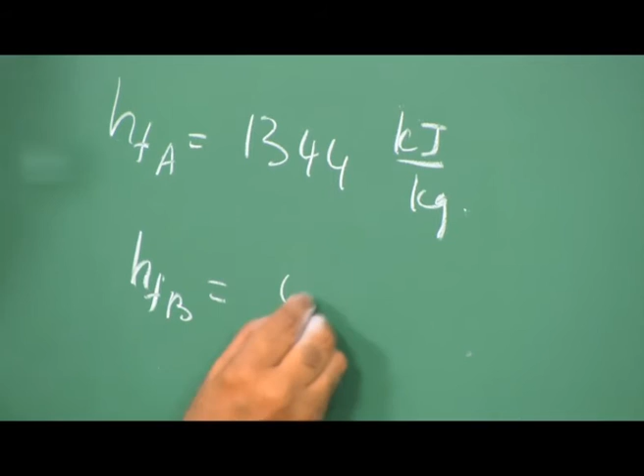And the last thing is the latent heat of water, that is the heat required to change the state from B to the evaporation condition over here, that is the saturated vapor. The heat required to go from here to here is HFG, latent heat, which at 1 atmosphere pressure is 2258 kilojoules per kilogram.

Therefore, if I were to solve this problem, what is it I am looking at? Let us say the original mass of water is 50 kg. The excess heat which it contains at this particular point is equal to HFA minus HFB over here, because this is stable, this is pseudo stable, this is the heat which is contained, and part of it, m dot mv, evaporates into steam.

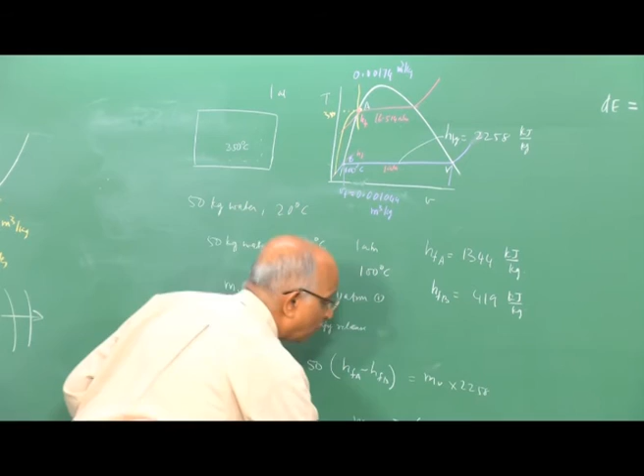How much is there to be able to evaporate? It needs 2258, or rather the mass of vapor formed is equal to 50 into HFA which is 1344 minus 419, divided by the latent heat, which is 2258, and this comes out to be equal to something like 20.5 kg.

Now, if I take a look at the volume of vapor here, the volume here corresponds to 1.6729 meter cube per kilogram. That means the 20.5 kg of steam at this condition is formed, it has a volume which is maybe more than 1000 times the original volume, and therefore it just generates a high pressure within the furnace, and you have something corresponding to this energy.

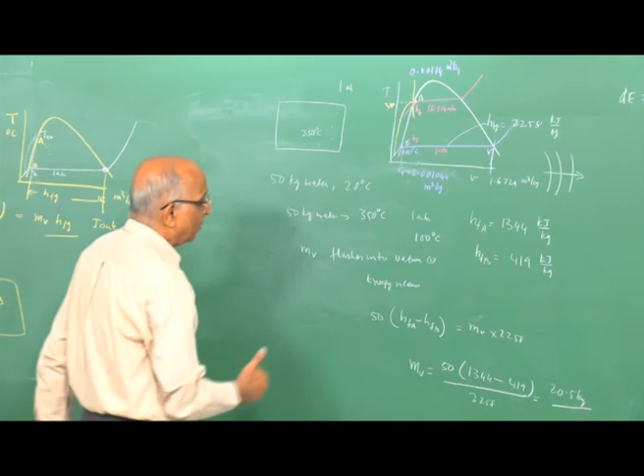I have a wave which is being formed, and therefore this flash vaporization leads to a blast wave which causes an explosion. I should not really be talking in terms of the pressure being formed. All what I say is a large volume of vapor is being formed, which results in an explosion. And this is the phenomenon behind an explosion.

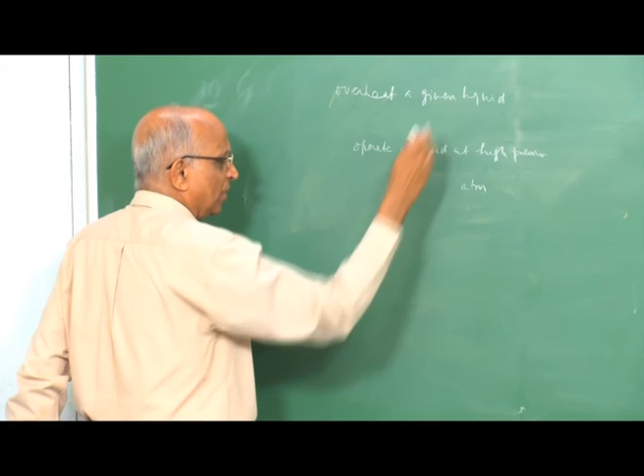And therefore, to sum up, what we have been talking today is that a physical process like sudden vaporization, because we either overheat a given liquid, or it could be any liquid, or else we operate a liquid like butane at high pressure, and when we relax the high pressure to atmospheric pressure, or when we overheat the liquid at atmospheric pressure, there is a lot of energy which gets locked in.

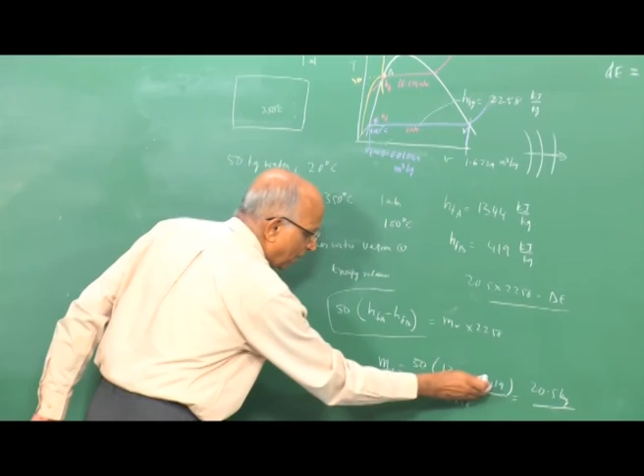And how do I calculate this energy in this particular example, which we forgot to do? Well, the energy which is locked in is 20.5 kg of vapor into the latent heat 2258, that is the amount of energy which is locked in, or alternatively I just say 50 into 1344 minus 419, so much kilojoules is the energy which is locked in, and this gives me the value of energy which is locked in, which in turn drives the explosion. This is all about the case of flash vaporization, but flash vaporization has a lot of applications and it leads to different types of explosions involving maybe cryogenic liquid storage.

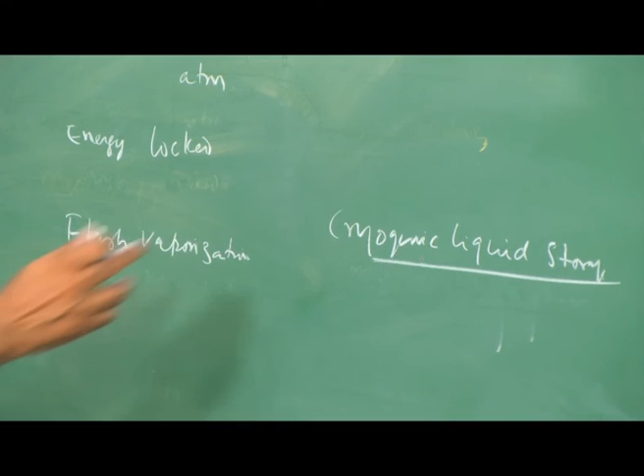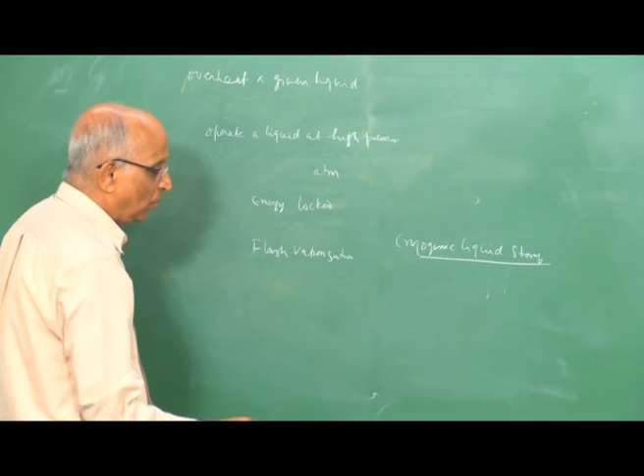We will talk in terms of some explosions involving cryogenic liquids in the next class, but we will also see whether we will talk in terms of shock waves, and it is quite possible that the vapor also condenses under some critical conditions. We have something like a metastable vapor being formed. It could also drive a blast wave. Therefore, we will talk in terms of cryogenic liquids and vapors, and also we will take a look at explosions involving maybe bursting of spheres, bursting of vessels in the next class, right?